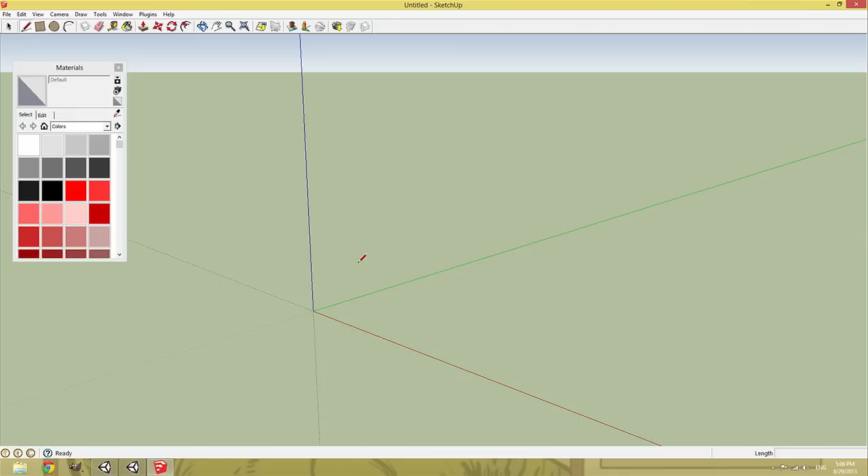So I'm going to go over to Unity now, or actually I'm going to go over to SketchUp now. I have yet to find a static, sort of non-animating, non-moving object that I couldn't find in the 3D warehouse. So here's the 3D warehouse right off the root of the file menu. Get models. We're about to see how good my internet connection is. It's okay so far. Sofa.

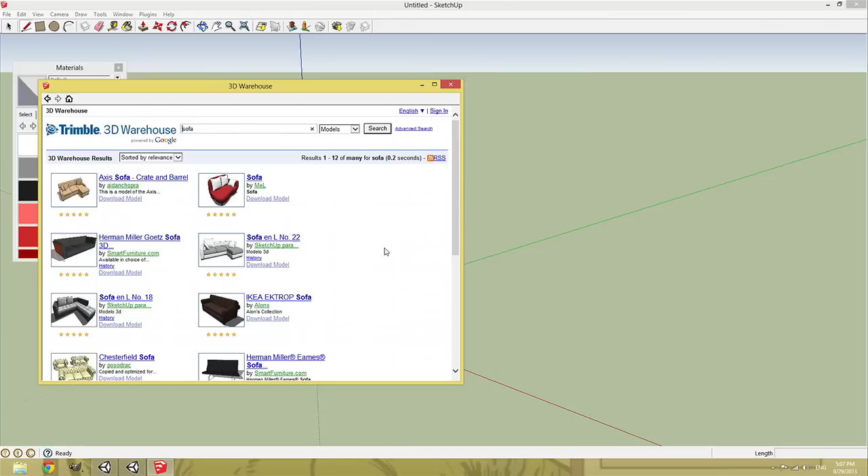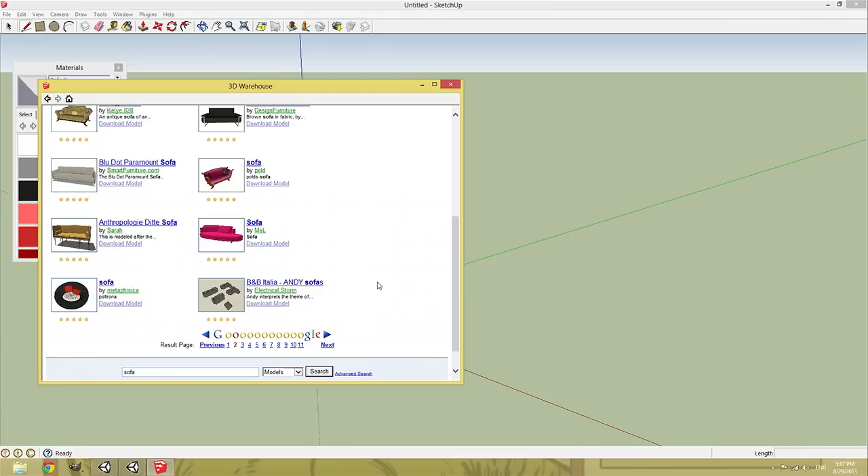So it's showing us 1 to 12 of many. There's all kinds of sofas already in SketchUp, and my game's sort of kind of low poly. It's not, you can't... this is not a solution for AAA. This is a solution for if your game looks sort of stylized, or if you're or sort of lower poly than what you might see on consoles these days.

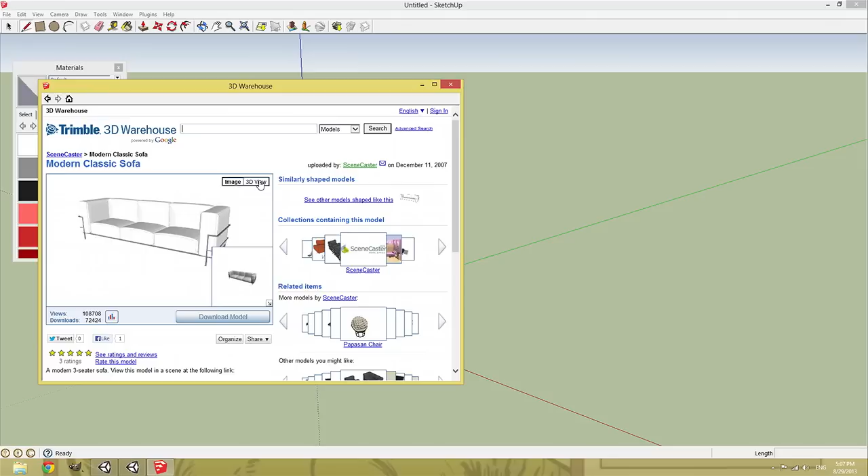But I will generally have an idea what I'm looking for. I'll go through SketchUp. I'll go through the Trimble warehouse. I'll check things out. I'll find one that looks like it might be sort of a reasonable fit for what I'm looking for, and then I'll download it.

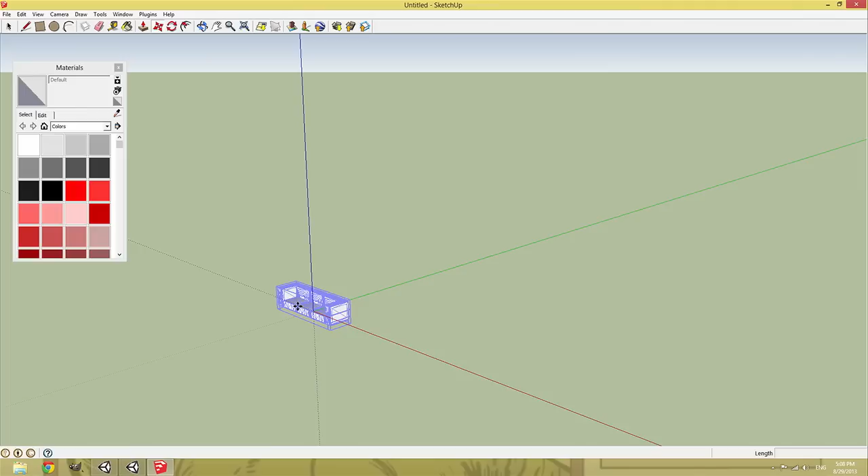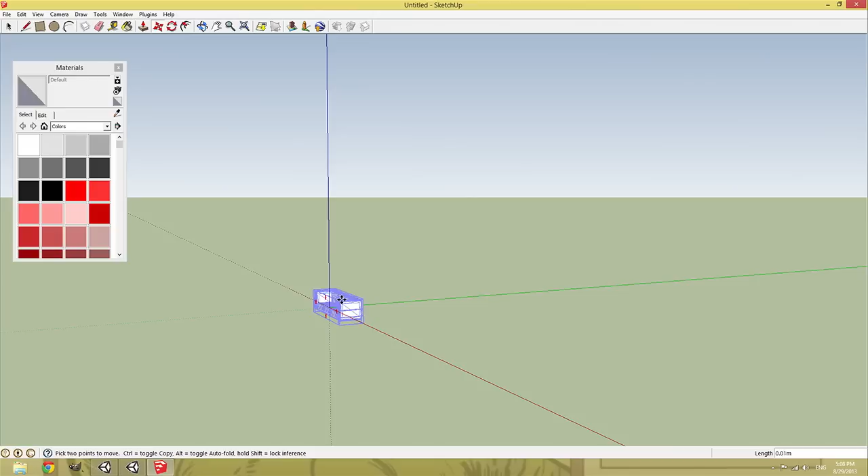You'll want to put it as close to the origin of Unity as you can, so when you bring it in, it'll be a game object you can manipulate easily. This one has come in below the floor, so you want to get it above the floor. Let's see... how's that?

If I was doing this at home, I'd take the extra minute to make it perfect, but since I'm just demoing it, I'll get through this quick and export it now. Then I'll save it as both a SketchUp file to keep around in case I want to make future edits.

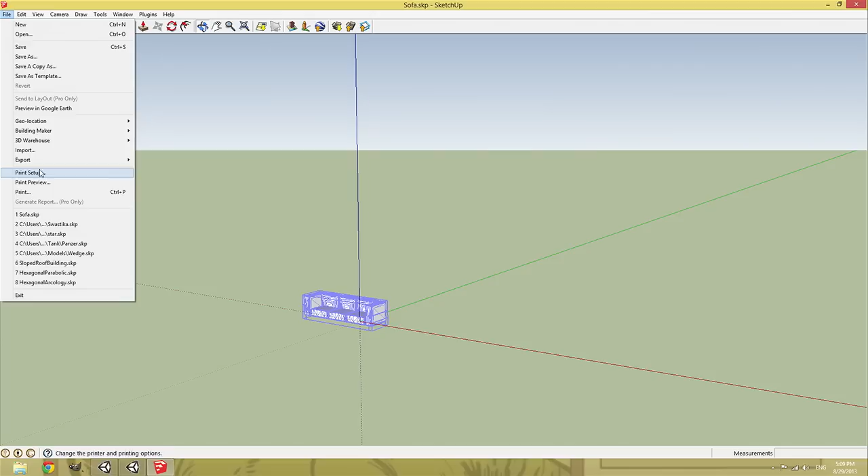I'll often make a new folder just for that asset. I'll have a models directory and a subdirectory with my individual assets - for now let's just call it sofa. And then I'll also export it as a DAE.

Now we can go over to Unity, and it'll bring in the sofa because Unity's awesome like that. Somebody mentioned in the previous talk scale - I generally find, and this may turn out to be an exception, that sofa looked a little small. I generally find people are pretty good about modeling with a consistent scale in Trimble Warehouse, and usually a scale of 0.02 is a good conversion factor to bring it into Unity with 1 unit equals 1 meter.

Other settings - I usually find myself turning on generate colliders, usually want them to be environment objects, and generate light map UVs. I'll talk about material search in just a bit. Let's first just get this sofa in and try to see it working.

Yes, I forgot to click the apply button. OK, so it's re-imported our sofa with my settings. In my scene, got this - where's my display platform? That's what I called it. Bring my sofa over there. Now, because I didn't set the pivot quite right in SketchUp before I exported, the pivot's off a little here, and the sofa is sunk a little into the floor, so I'll bring it up.

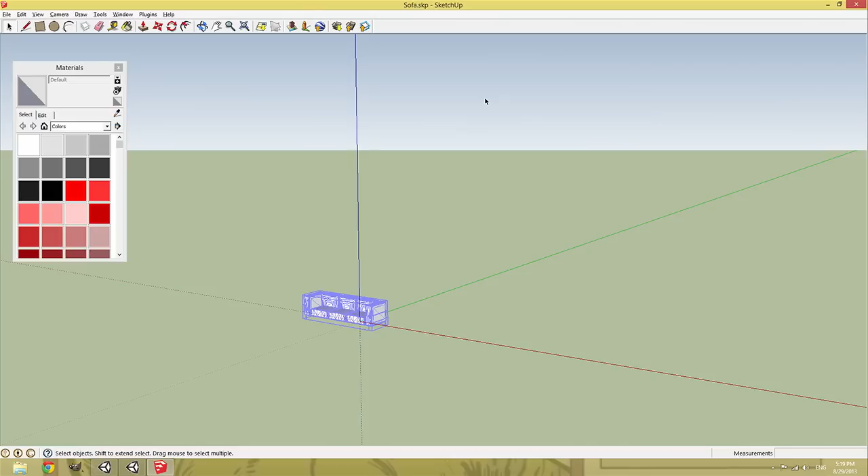Let's see, there was one thing I wanted to talk about that I didn't make a slide for, and that is, how am I doing at time, by the way? Anybody know? I got 10 minutes left? Cool.

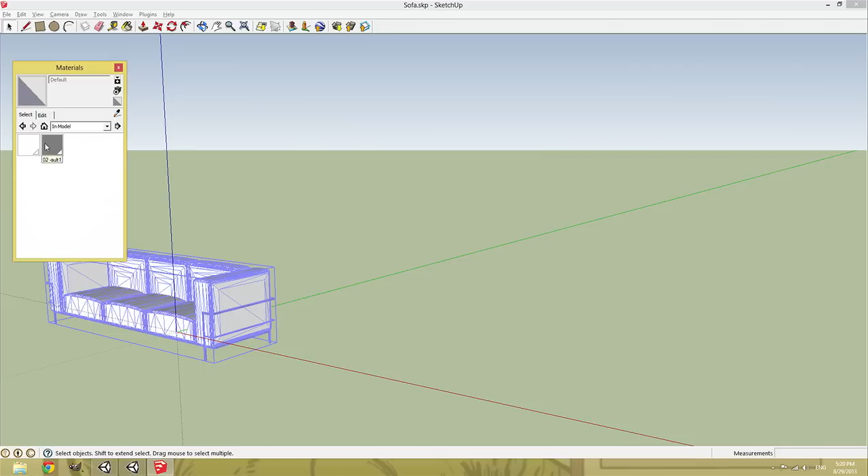Often the textures that you get out of Trimble Warehouse, particularly with buildings, are really bad. They either have a really low texel density, or the buildings typically use a satellite photo that's been mapped onto the building, so they've already got shadows baked in and stuff. So I very often find myself going in and cleaning up textures. Does this sofa have any textures? You go to colors in model to see what textures are on your thing, and no, not really, just default colors.

Let me pull in one of my assets. Not mine. This is another asset I got off of Trimble Warehouse not long ago. So I thought this rooftop texture looked kind of low in its texel density for my game, and you can edit textures simply by going to texture, edit texture image, and then it'll open up your texture program, and I use GIMP because I'm really cheap, and then you can clean stuff up in here.

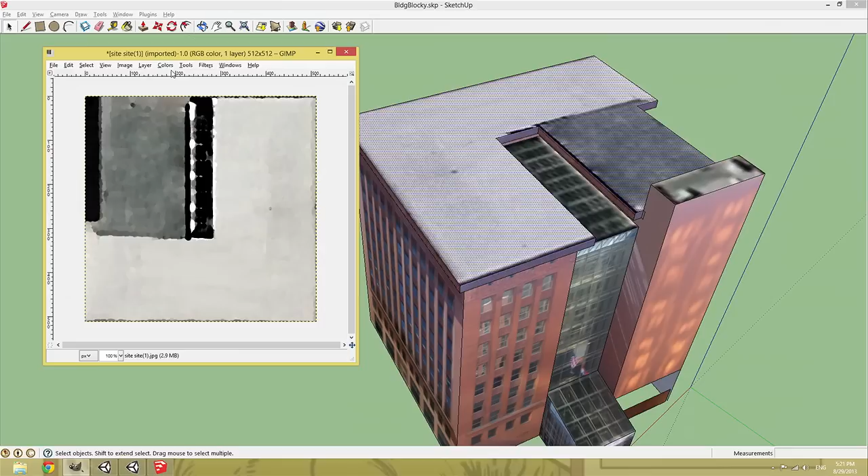One thing I've been doing a lot, just because I'm not an artist, is putting an artistic oilify filter on my rooftop textures to give parts of my game a sort of painted look, and you overwrite the temporary JPEG that SketchUp makes. And then it is saved into your SketchUp model. Then you re-export that.

I don't even have that building in Unity right now. But you get the idea. And then you bring that into Unity, and instead of having the manky texture that you got out of Trimble Warehouse, you've got something that looks like you gave it a little bit of love.

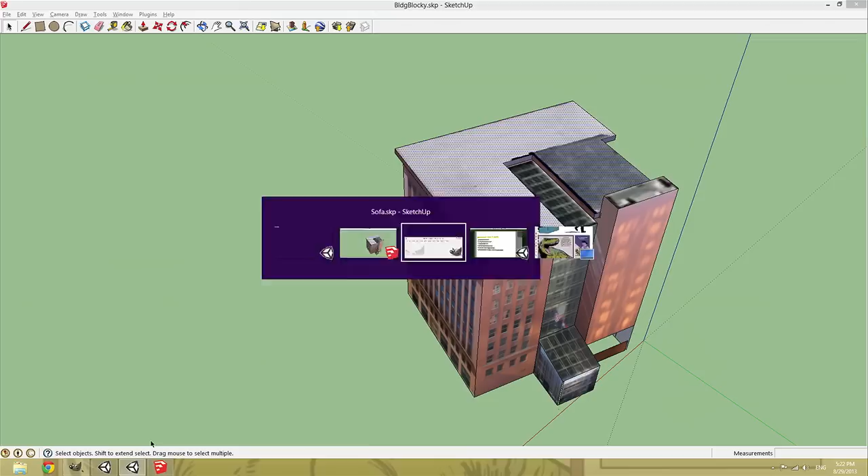And that really is all I wanted to share with you. So we could turn it over to questions now, if anybody has any.

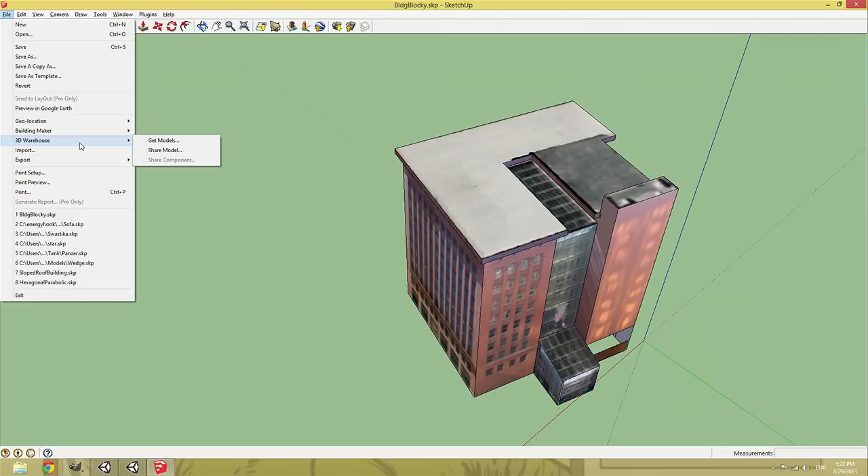Not so much a question, more a note. There is a plugin for SketchUp called LightUp that does a lighting solution for you, and also has a built-in FBX exporter. It's really good. It does a great job of exporting straight to FBX, bringing it to Unity, no problem at all.

So in case you didn't hear, because he's not on a microphone, he's suggesting LightUp is a pretty awesome way of not only exporting FBXs, but it also will do... Nice. Okay. It also generates light maps. So I will check that out. That sounds pretty awesome.

Why don't you hit one of the microphones so everybody can hear?

Have you tried polygon reducers with SketchUp? No, I have not. What's that? Like, it reduces the amount of polygons. Oh no, I haven't tried that. That sounds awesome because, although I'm typically worried about draw calls, triangle budgets have not been a problem for me on my game. When you do bring in a curvy thing in SketchUp, it does tend to throw a lot of polys at it. So a polygon reducing program would be good for cases like that.

Yeah, hi. I was just wondering, I know it sort of goes against the theory of free tools, but have you tried SketchUp Pro, and does the FBX exporter in that actually improve the performance in Unity? Does it make any difference? I have not tried SketchUp Pro, so I don't know. Has anybody else tried SketchUp Pro? And, yeah.

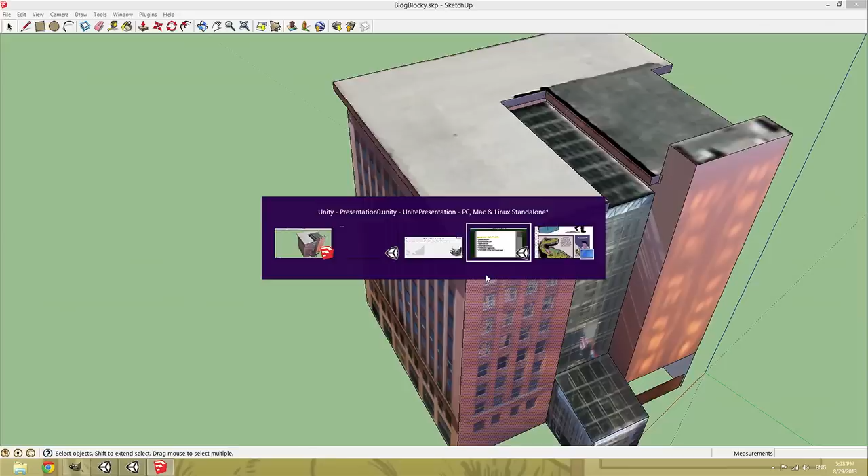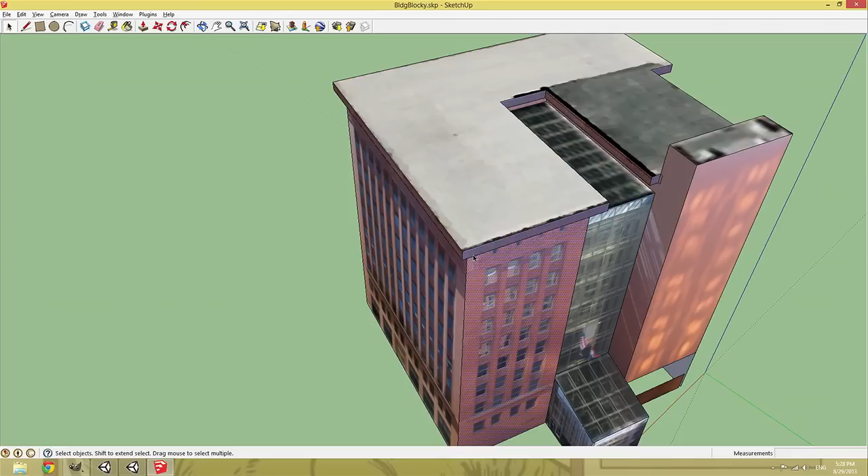Okay. Do any of these models come with normal maps at all? They do. When you export them, the normal maps are set up, and lighting just works. If you have some problems, sometimes there's issues with the ways the faces are oriented. I haven't had a problem like that for a while. Things have gotten better, but previous iterations had face orientation issues, but lighting has worked fine for me since then. And I've had more luck with the internal exporter. LightUp has had more issues with the face direction stuff than the internal exporter has had for me.